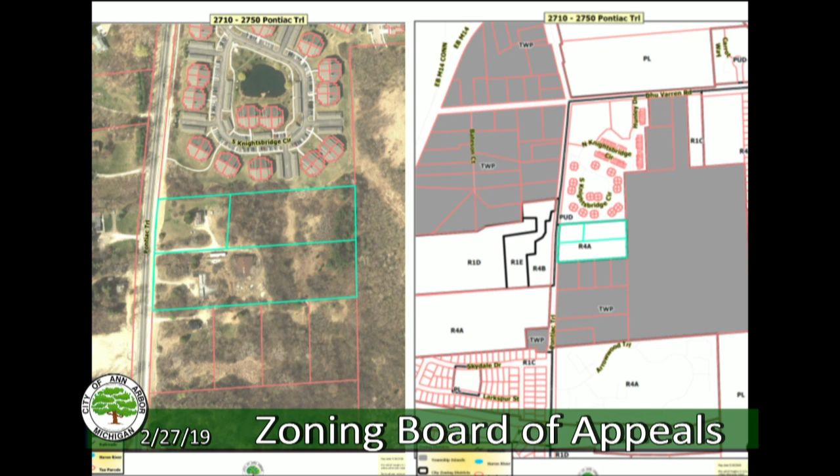As you can see from the aerial and the zoning map, there are 3 parcels. As part of the approval, they will be required to be combined. This site is located on the east side of Pontiac Trail, just south of Dhu Varren. It is zoned R4A, multifamily residential. There is some R4B and R4A and additional single-family residential to the west, and there's a PUD to the north.

This is the existing site, existing conditions. There is a mid-level woodland on the east side of the site, shaded in green. There's also a 30-foot storm easement that runs through the rear side of the site. The orange shaded areas are the existing structures that are proposed to be removed. I believe all of them are vacant.

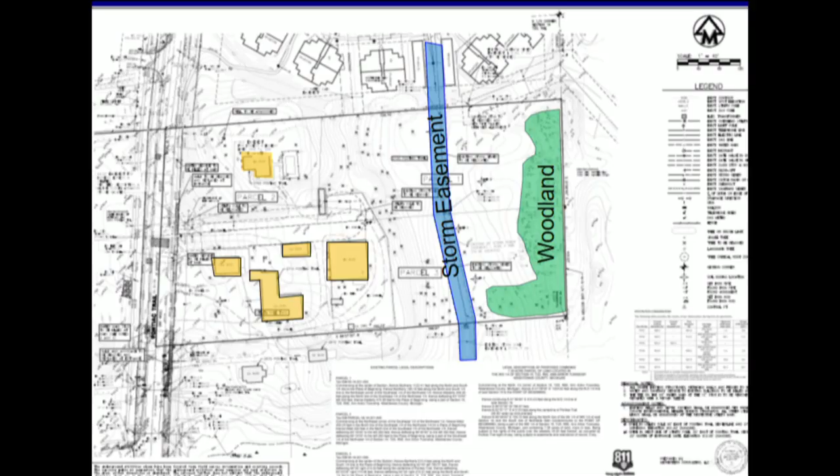This is the proposed layout that was approved February 5th by the Planning Commission. There are 69 townhouse units. The blue areas are the stormwater detention for this site. There are some green areas, which I'll show in the next slide, where the woodland is. If you want to go back real quick.

So what we've got here is 69 townhouse dwelling units. Each one has a garage below the units, at grade. They've also proposed 25 surface parking spaces that you can see mostly towards the front of the site, but there are some around the drive, around the perimeter. So they do have 94, which we would legally be able to accept as parking spaces.

But there are 34 tandem spaces. In the next slide, I'll show you where those are located. They also have room in each of the driveways leading to these units for an additional 69 driveway spaces. So it's an additional 103 spaces, but we cannot count them per city code.

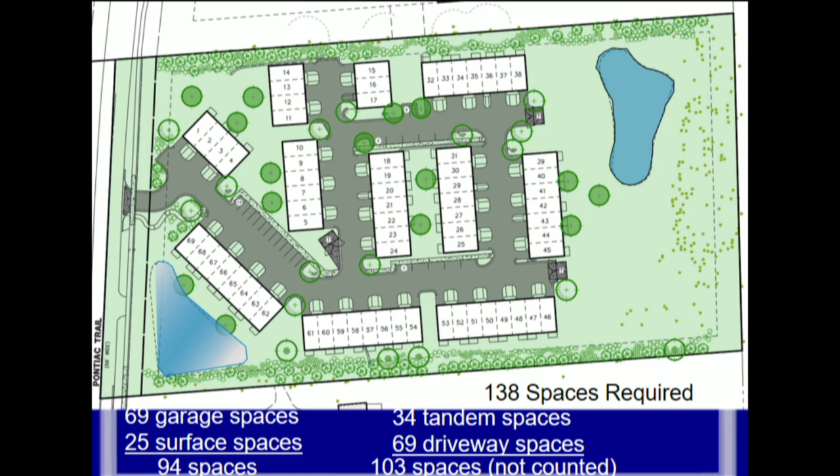Here you can see the units with the tandem garages. These are the units that each have spaces one behind the other, when I say tandem. We can't count those because one of the cars parked in front cannot get out without a roommate or resident moving a car. So the orange ones depict where the tandem spaces are, and it mostly has to do with the grade on site. There are some steep slopes out there.

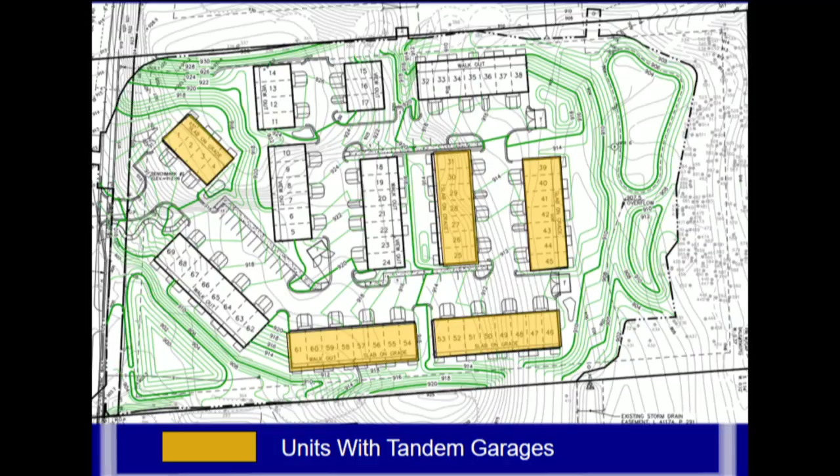Again, this one probably looks a little familiar to you. This looks like West Town. I believe it's now called Blue Heron, out on Maple and West Liberty Street. So you're seeing a very similar product with the parking below. That was an 8-unit; this is a 6-unit type of townhouse structure being proposed.

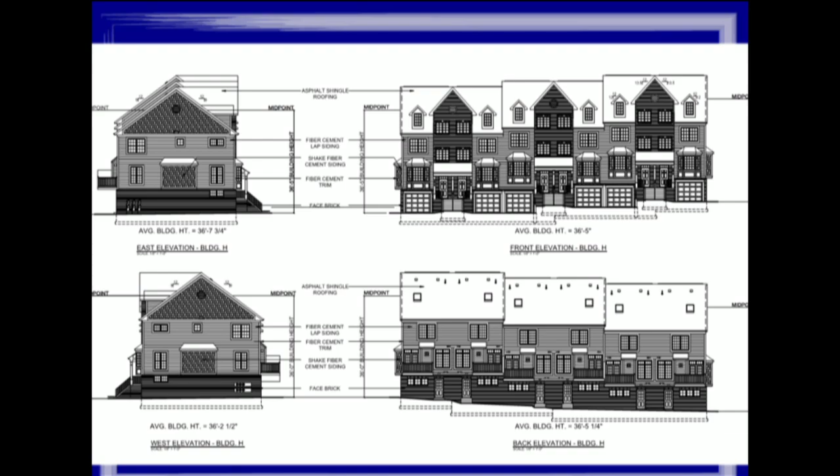Here we've got the layout. This is the foundation and that grade. Might be a little difficult for you to see, but this is where you've got the drive where you can park, and then the tandem spaces, one in front of the other, that we'd like to count as 2 spaces.

And you can move forward again. Slow one, okay, it's got a little slow. So while it's moving forward, I'll give a little background on this proposal. The petitioner did come in early on. They could, in fact, probably add this surface parking space on site, but it would impact natural features, whether landmark trees or woodland. Adding this impervious surface would also increase the stormwater detention ponds, so it has a greater impact on the site as far as impacting natural features and stormwater detention.

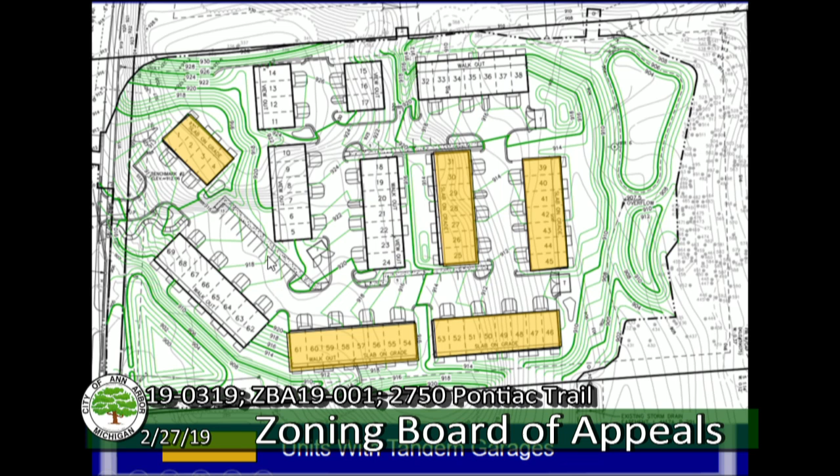Right. And then, is there anywhere else in this development that you could park that's not in a driveway or a garage, except for those spots? There's some spaces, yeah, to the north and to the south, but you're looking at 4 or 5 and another 4 or 5. But not like parking on a street anywhere or? That's correct. Got it. Okay, thanks.

Any other questions for staff?

All right, the petitioner could please step forward, state your name for the record, sign in. You'll have 5 minutes. Good evening. My name is Scott Betzold. I'm with Midwestern Consulting, a civil engineering consultant on this project. With me tonight is Brad Moore, the architect of the project, and David Derekowski representing the petitioner.

Just a real quick summary of numbers. I'm a numbers guy. There are 138 spaces required by code for this project. We have provided 94 that are recognized by code. We've provided 103 additional usable spaces that are no different than the spaces actually across the street in the R4B district — their driveways are 20 feet long, our driveways are 20 feet long. They're going to park their cars in their driveways, just like these people are going to park their cars in their driveways sometime. So we're providing 197 usable spaces on this project, when 138 are required.

So that goes to the question of what about guest parking? Well, you're going to have more guest parking the more spaces you can provide within these units and in front of these units. People treat the driveways in front of a unit like this just like a driveway in front of a single-family dwelling. We've designed houses that are 20 feet from the garage door to the sidewalk day in and day out these days, and that's exactly what this is. So they will function no differently than the houses that Pulte is building across the street.

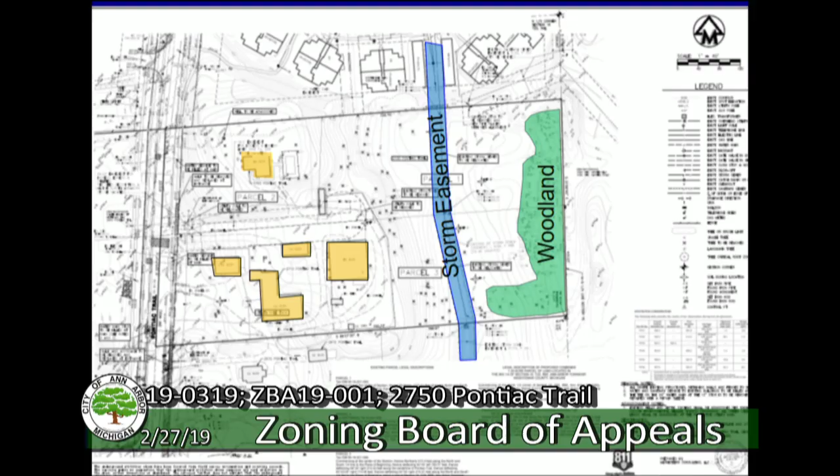Understood. And I understand there may be woodlands elsewhere, but the city values the woodlands wherever they occur because they tend to do things like filter air and filter water and offer habitat. So they view them as valuable on every site that they're on.

Additional questions for the petitioner? Elizabeth? I think staff mentioned something about the impact on stormwater retention if you had to build more parking - in addition to the impact on the woodlands, but how much more allowance would you have to do for stormwater retention? I'll let the civil engineer take that question.

Well, it's hard to quantify exactly how much bigger the pond would have to be, but we'd have to create almost the equivalent of all those driveways in front of every unit - they'd have to be displaced somewhere else on the site, including the aisle to get to them. So the ponds would probably grow 25 to 33%, which will require additional woodland removal as well.

Thank you. Mike? Just one last question. So let's say someone who doesn't live here, who doesn't have access to the driveway or the garage spots, comes and all the guest spots are filled. Where, in your opinion, do you think they would go park?

Well, I don't know - they'd probably, if it was me and my friends, contact the people they're going to visit, see if they can rearrange their cars, see if they're in the right spots. But some of these people might have more than one or two friends they want to have over at a time. At the end of the day though, what we're showing is we're providing 197 spaces when 138 are required by code.

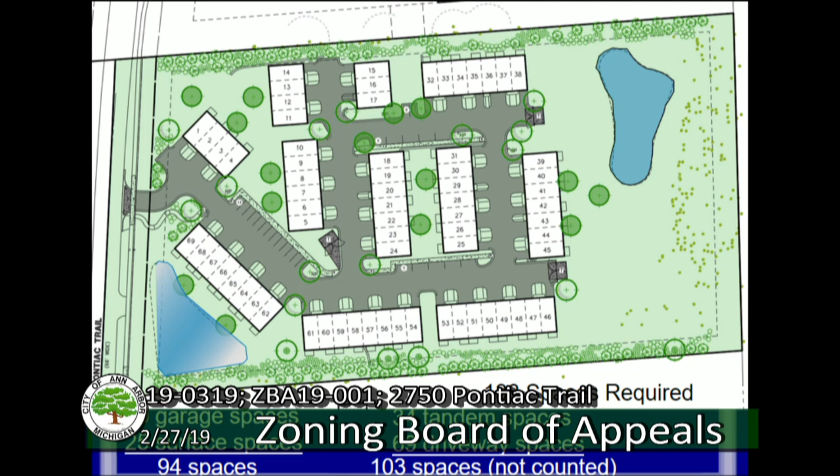We have 197 total spaces. Right, but the surrounding area isn't exactly a place with many spots to park - so at Blue Heron, do you guys ever ask your neighbor, hey, I'm having people over, can someone park in front of your garage? We have people park in the parking lot for the city tennis courts across the street, or we figure it out, but it is annoying, I will say that. But I also think there are more spots here than at Blue Heron, so that's fair to say.

I was just asking, since there isn't a public lot nearby. The closest place, honestly, they could go would be up to the park and then walk down from there, which there are sidewalks linking the park here. So, Super Bowls maybe.

Great, thanks. Yeah, everything comes at a cost. Anybody visit the movie theater over on Carpenter Road and Ellsworth and ever see it fully parked? Anybody ever see the parking lot at Target fully parked, other than just in front of Target? You can have catastrophic parking provided, but we don't design 8-lane roads to come in and out of Ann Arbor for game days either. So everything comes at a consequence.

Thank you. Any other questions for the petitioner? Is there anyone here from the public to speak on this petition? I will note we did not receive any communication, so seeing no one, we're in discussion.

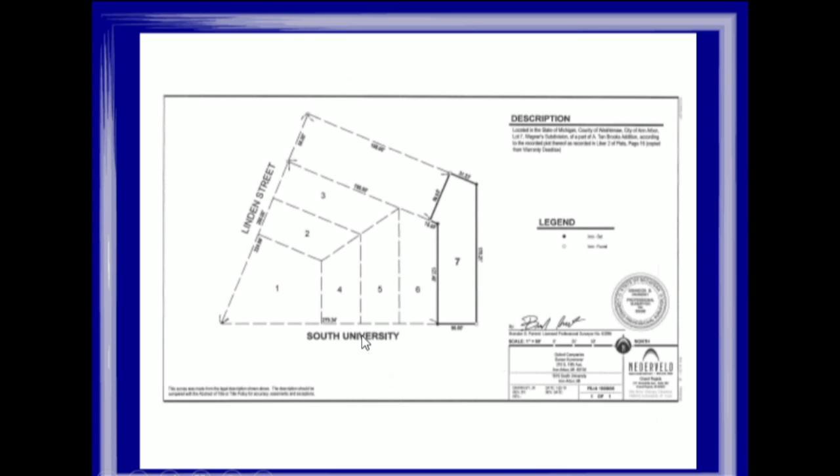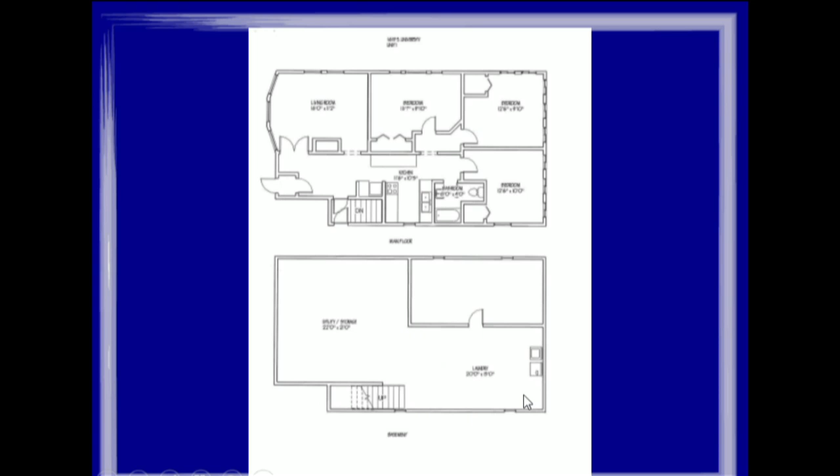That's the same for the second floor and the attic. Unit 1 on the first floor will have 3 bedrooms, and then there's the basement. So 2 units, 9 total bedrooms.

These are the photos submitted with the application, and these are the photos I took when I was out at the site for inspection. You see the existing home in its current state. This is looking down the driveway towards the rear, and also the abutting property.

This is the rear of the property, the parking lot for the tenants. This is looking directly back towards the back of the home, the adjacent property to the east, and adjacent properties to the west. And this is the property directly across the street on the south side of South University.

That concludes my report. I'll take questions at this time. Thanks, John. You're welcome. Questions for staff?

Todd, just to confirm, the report indicated there are no external changes to the envelope of the building. Correct. Okay, everything will be internal. It's basically just creating a second unit in the home.

Any other questions for staff? Dave? So is it, because they're doing a second unit, they need a variance?

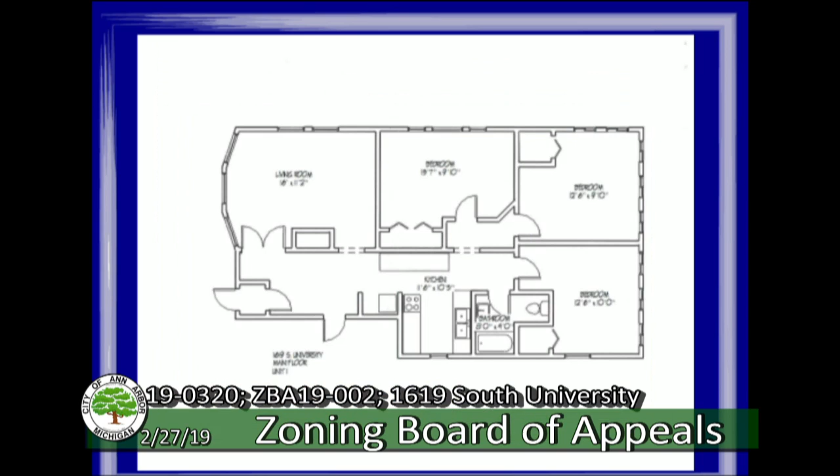The side doors to the basement where laundry is. Is this the main entrance? I'm sorry, can you come closer? He's got it up here. Okay, so on that top plan where those 2 doors are kind of overlapping, that's the main entrance?

Nope, the other one by the stairs. This one right here? That's to the basement. That's the basement, yeah. Okay, I'm still a little confused, but okay.

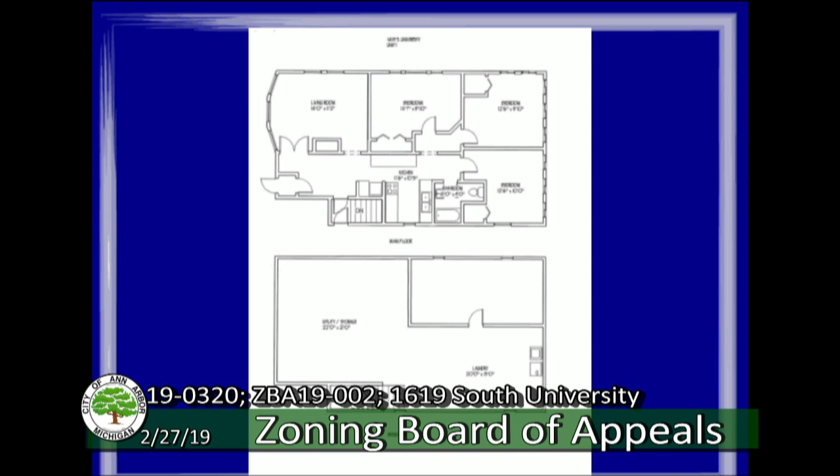Thanks. Any other questions? Dave, just a quick question. How many parking spaces are there now? 6 for 10 people, and again, we're dropping down to 9.

Parking. Don't start it. It's 3 per unit, parking spaces. Any other questions for the petitioner?

Okay, thank you very much. Is there anyone here from the public to speak on this petition? I'll note we did not receive any communication on this in our packet.

And with that said, we are in discussion. Todd? This is an easy one, they're not making any changes to the outside of the building. I'll vote yes.

So we're ready for a motion? I'll make a motion. Okay, thank you, Dave.

Petition ZBA 19-002, 1619 South University, variance. Based on the following findings of fact and in accordance with the established standards for approval, the Zoning Board of Appeals hereby grants the following variance from Chapter 55, Unified Development Code, Table 5.17-2, 2-family residential zoning district dimensions. A variance of 10 feet to allow the conversion of an existing 9-bedroom single-family unit into a 2-unit duplex consisting of a 3-bedroom unit and a 6-bedroom unit. The construction is to be built per the submitted plans.

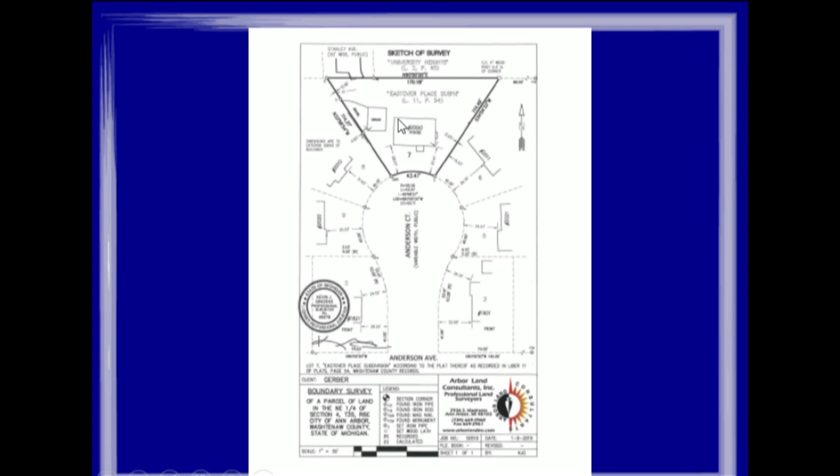Currently has an old, somewhat dilapidated front porch that will be removed, and there'll be a front porch proposed across the front of the house. And then the connection with the garage to the home. The garage is currently 4 feet 10 inches off that side property line, and once it is connected, they're required to have 5 feet from the side property line, resulting in that 2-inch variance.

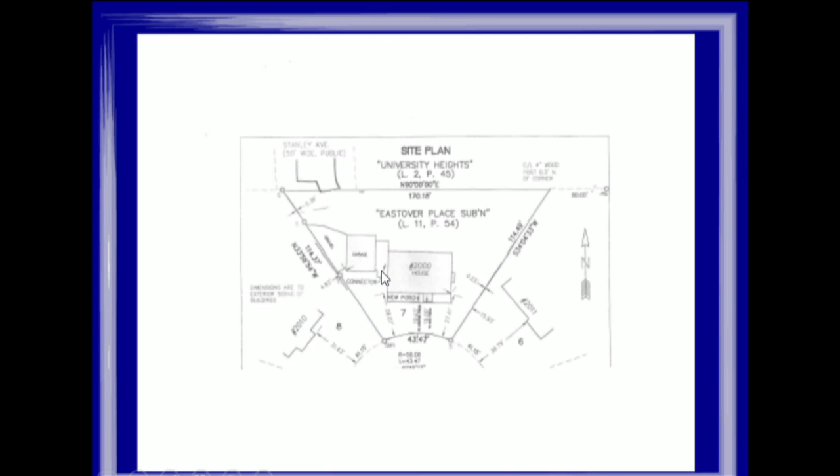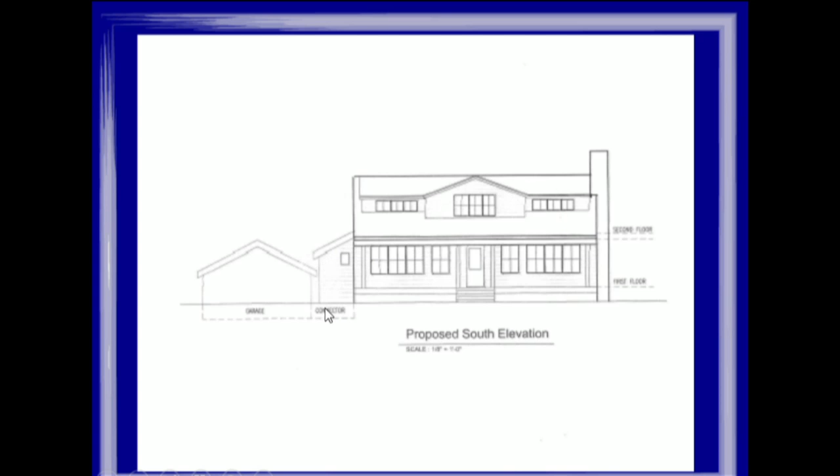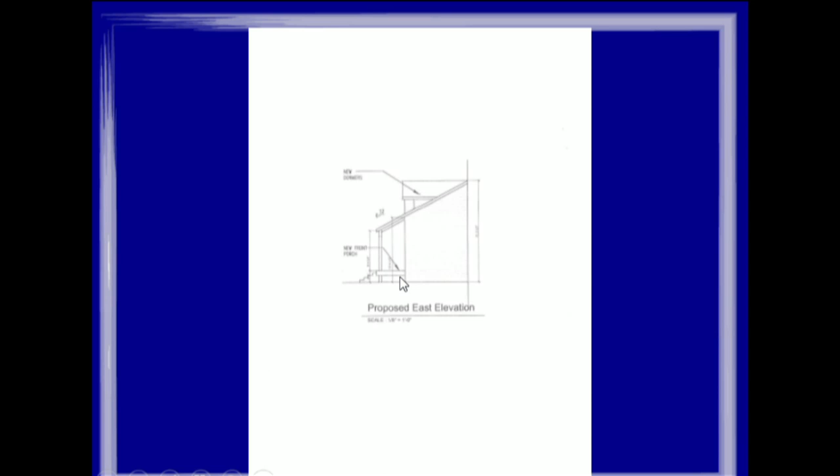This is an elevation that was submitted, looking directly at the home. The south side elevation, you see it is the existing one. And this is the proposed, how the home will look with the new front porch and the dormers above, and then the connection between the garage and the home. This is looking east, the existing elevation of the home, and you see the existing porch. The next slide is with the proposed porch and the dormer.

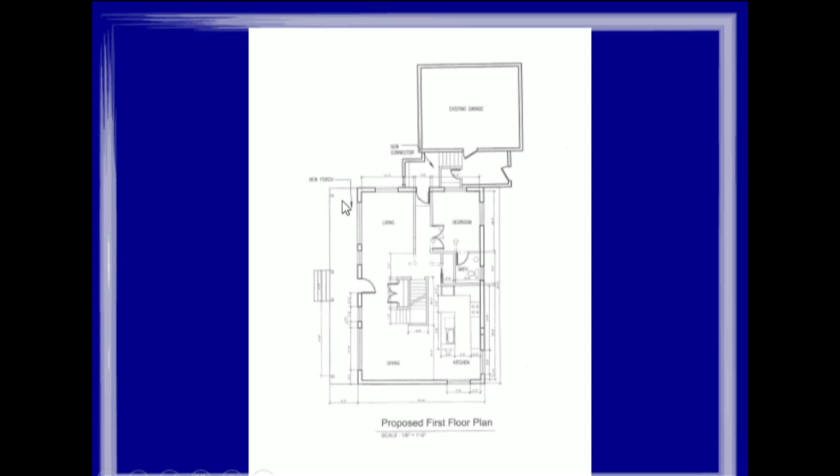Questions for staff? Dave? Two things. The front porch isn't currently covered with a roof, correct? Or so it's really a stoop?

Correct. What's in the single-family residential zoning district, if you don't use averaging, what's the current zoning setback requirement? The home is currently zoned R1C, and it would be 25 feet.

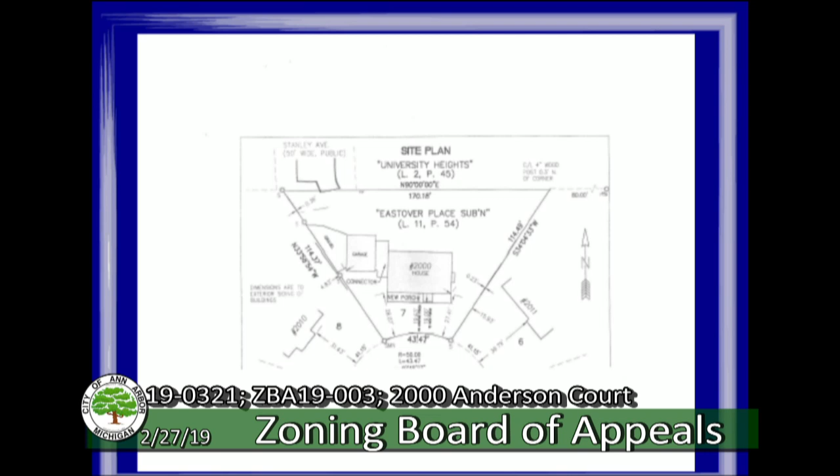But if you look at the site plan sketch of the survey, you can see how the properties directly to the east and west, especially the one to the east, it's 39.79 feet. It really skews the average because the existing home is only 27 feet. So it's significantly how it sits now. Any improvement they make, they're going to need a variance because they don't meet that average right now.

Elizabeth? The pictures you showed tonight were clearer to me in terms of understanding the surrounding houses. From the aerial photo, it looked like the houses next door were previously smaller and were added onto. I'm trying to figure out if this addition is similar to what happened in the cul-de-sac years earlier to the other houses. Maybe that's not relevant, I'm just curious.

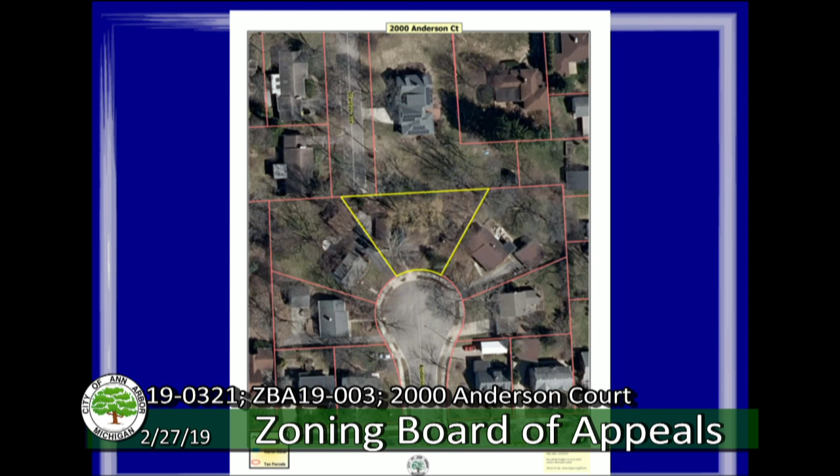Dave: So the second floor dormer that they're proposing is going to be even with the existing structure? Correct. So really, the new incursion closer to the front property line is all front porch? That's correct. With a roof on the porch? That's correct.

Any additional questions for staff? Okay, the petitioner's here. If you could please step forward, state your name for the record, and sign in. You'll have 5 minutes. Hi, I'm Carmel Gerber.

Just to give you a little history on the house, it's a really nice neighborhood, and unfortunately this house was really neglected. The person was a hoarder, and it was completely neglected, and it kind of dragged down the whole cul-de-sac. When I first bought the place and we cleared everything out, you couldn't even see the house because it was so overgrown. The neighbors were coming and saying thank you for finally clearing it out, you've really improved the cul-de-sac.

So there are kind of 4 parts to this. First of all, we wanted to connect the house to the garage. The garage is on a hill, a bit lower than the house, so to access the house you have to go upstairs, and it's very awkward, and the existing stairs are concrete and all cracked.